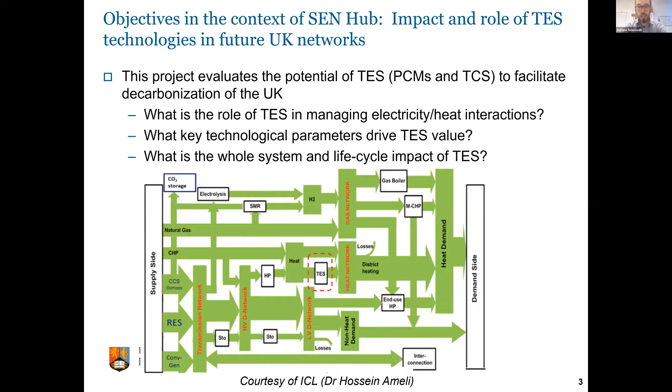As you see in this schematic that Hossein kindly passed along, the focus will be on this part - the role of thermal storage, with a focus on how these possible portfolio technologies interact with the whole UK energy system.

As you might appreciate, this obviously requires research operating on different axes. From the University of Birmingham, we focus mostly on the technological and techno-economic characterization and reduced models of specific thermal energy storage technologies, which I will discuss in more detail later on.

This technical and techno-economic information is shared and exchanged bilaterally with the investigation at the University of Manchester regarding life cycle analysis of these technologies, as well as the integration of these models into the whole system modeling platform developed at Imperial College, with the aim to understand the impact and value of thermal energy storage technologies when deployed across the United Kingdom and different regions.

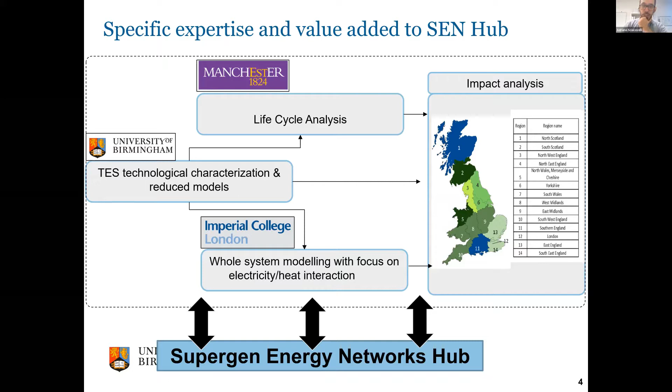One of the key ambitions and objectives of this project is not only to carry out this piece of meaningful research, but also to bring to the Supergen Energy Networks Hub a set of specific expertise on such technology and approach, to contribute to the ambition and objectives of the Energy Network Hub.

So I would like to spend the next few slides commenting on and presenting the precise contribution and work going on from our side at the University of Birmingham, and how this feeds into the work at Manchester and Imperial College.

We are focusing this project on two specific classes of technologies: latent heat thermal energy storage technologies, as well as thermochemical energy storage technology. So we are focusing on near-to-market solutions, namely latent heat storage systems, as well as storage solutions that are in R&D stage, which are the thermochemical energy storage.

And we use instead sensible, conventional, well-established storage technologies as a baseline for cross-comparison of the impact of latent heat and thermochemical storage options.

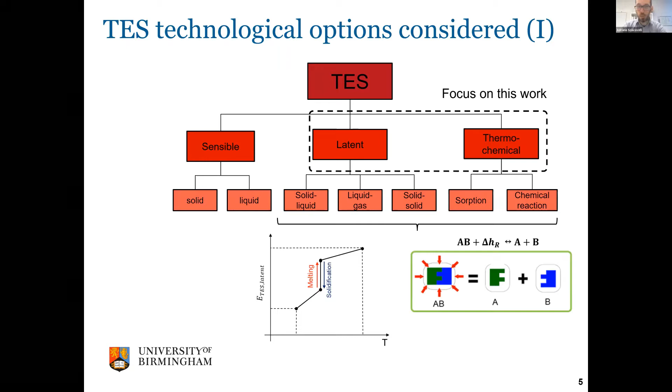For those who might not be familiar, latent heat storage options operate by the working principle of melting and solidifying suitable materials, called phase change materials. So heat or cold is stored in the form of latent heat, while thermochemical storage systems exploit reversible chemical reactions - heat is stored in the form of chemical bondings, allowing higher energy storage densities and longer duration storage.

The work at Birmingham has been focusing on extracting the key techno-economic parameters of these two technologies, as well as producing reduced models that can support the life cycle analysis and whole system analysis carried out at the other two institutions. So on this slide, as exemplar cases, you can see at a laboratory scale...

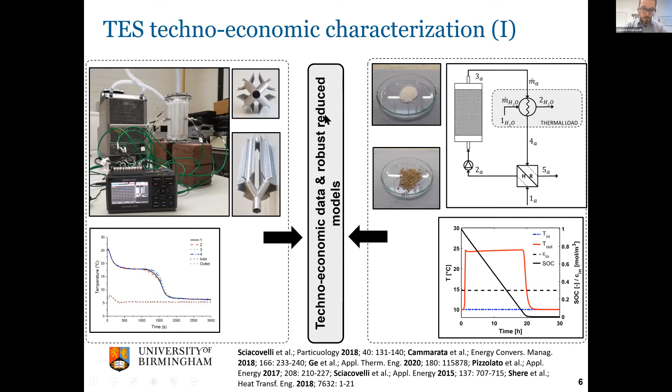These are salt hydrates that allow heat storage by reversible reaction of hydration and dehydration. The key here in this project is not technological development, but extracting the right and accurate techno-economic parameters and models so that life cycle analysis and whole system analysis is grounded and based on meaningful technological data.

So we have developed a procedure to extract these techno-economic parameters, starting from the development of a comprehensive database that covers multiple implementations of these two technologies, latent heat or thermochemical storage technologies.

We are focused mostly, for latent heat, on systems suitable at domestic scales - systems using PCMs that are paraffins or fatty acids with storage temperature typically from sub-ambient for cold storage to about 100-120 degrees C. For thermochemical storage systems, we have been focusing on salt hydrates, which are the most suitable for domestic applications.

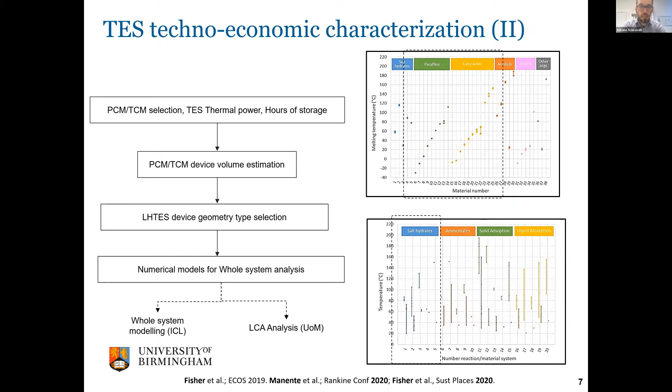The techno-economic database starts from selection of a candidate, assesses the typical requirements for thermal power and hours of storage, then identifies the necessary volume of the storage system and possible geometrical configurations, ultimately producing reduced numerical models that can be integrated into the whole system analysis, while techno-economic parameters can be easily included in the life cycle analysis.

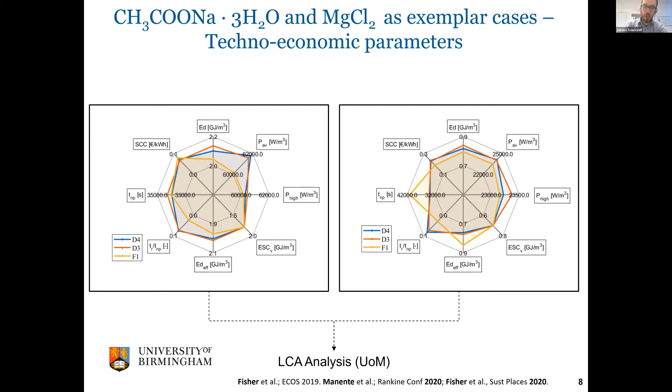So I'll take a couple of exemplar cases of how these techno-economic results appear in our study. Here you see two exemplar cases of the range of techno-economic parameters we are extracting to support the analysis. Sodium acetate trihydrate is a typical phase change material with a good range of energy storage density, power density, and cost, while magnesium chloride is a typical thermochemical storage material used in thermochemical storage systems, allowing sufficient energy storage density and relatively compact solutions suitable for compact storage systems. These are the typical techno-economic parameters we are putting together to support the life cycle analysis.

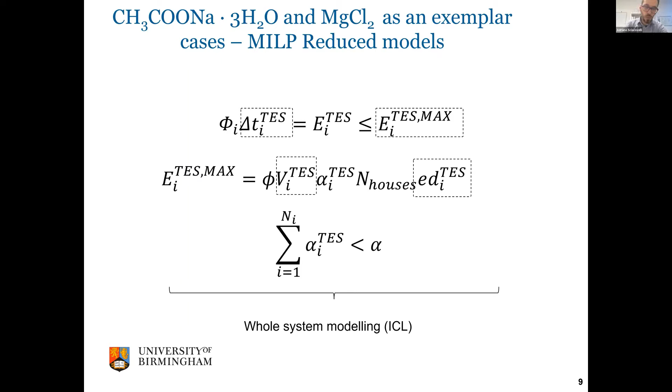For the reduced modeling approach, we have developed together with colleagues at Imperial College a mixed integer linear programming framework of reduced model of thermal storage that allows us to embed key performance indicators, namely energy storage density, maximum energy stored, and volume of storage system, into the whole system modeling. A key feature of this reduced model is that it allows us to account for different types of storage systems distributed at different locations across the UK. This is captured by a parameter that allows the best storage system to be distributed in the best location across the UK.

So this brings me to my last slide. Just to reiterate, the project addressed the whole system role and value of thermal storage technologies, particularly PCM-based and thermochemical storage-based. At the University of Birmingham, we are focusing on the techno-economic parameters and reduced models to support the life cycle analysis and the whole system analysis.

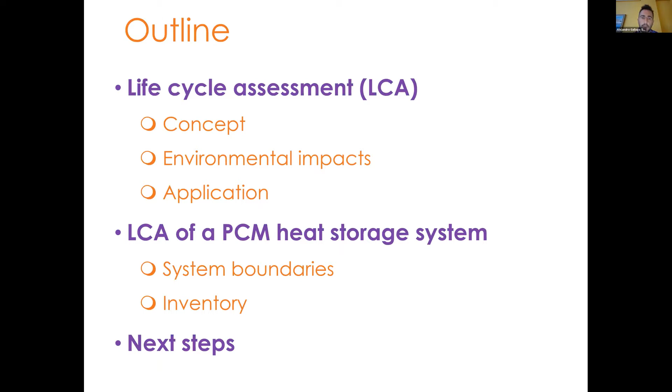I'm going to be talking about the main environmental impacts that we can calculate with LCA and some of the most common applications of this tool. After that, I'm going to focus on the work we have been developing in this project, which is the LCA of a PCM heat storage system. This is work in progress, so I'm going to present just a snapshot of what we are doing at the moment. So far, we have defined the system boundaries and collected all the inventory data. Finally, I'm going to present the next steps we are going to be doing in the following months.

Life cycle assessment is an environmental sustainability tool that allows us to calculate or quantify the environmental impacts of different products, processes, or services, and it's based on the concept of life cycle thinking. And maybe the next question you have is, what is life cycle thinking? For example, as a consumer, I have bought the laptop in front of me, but if I start to think what impacts this laptop has, maybe I only realize what I see, which is the impacts of taking my car to the shop to buy the laptop. If I think a little farther, the electricity when I'm using the laptop can have some environmental impacts. And if I go even farther, what are the impacts associated to the end of life of this laptop? What happens regarding the different materials, if it goes to recycling, landfill, or incineration?

But obviously, there is much more, and that's the concept of life cycle thinking. We have all the impacts associated to the life cycle of the product.

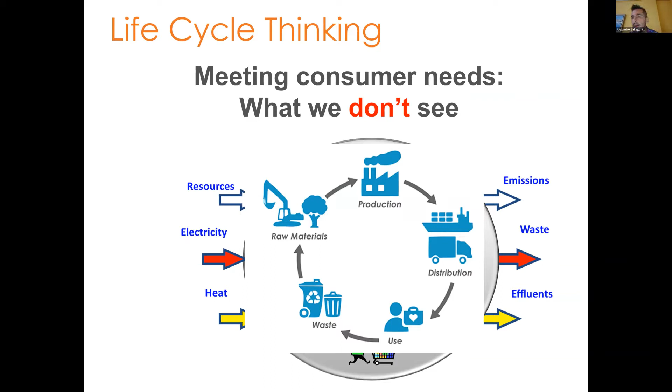That's the concept of life cycle thinking, summarized well in this final image. When doing a life cycle assessment with the environmental part, we consider all the impacts associated to the extraction of raw materials, to production, to distribution, to use, and to end of life of a product. But as I mentioned, it can also be applied to a process or a service.

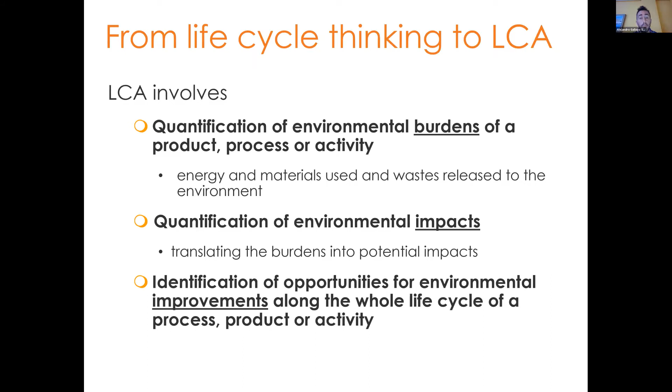Basically, what LCA does is quantify all the environmental burdens of this product, process, or activity. We collect all the energy and materials used and waste released to the environment, and we quantify the environmental impacts by translating the burdens into potential impacts, as we'll see in the next slide. That allows us to identify opportunities for environmental improvements along the whole life cycle of a product, process, or activity.

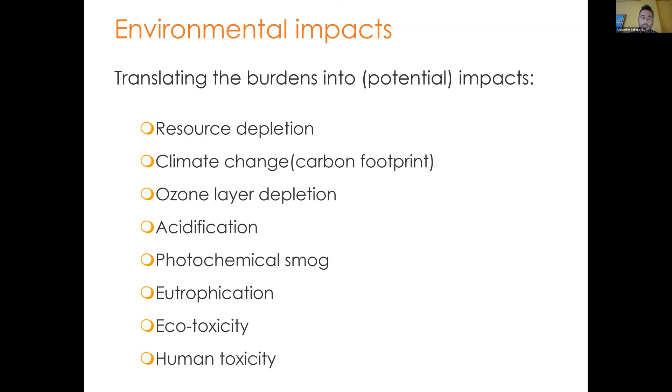So one question can be, what environmental impacts do we consider? With the methodology we use, we are able to calculate up to 18 different environmental impacts. You have some examples: acidification, eutrophication, resource depletion. Maybe you have heard already the term carbon footprint. Carbon footprint is nothing else than an LCA applied only to one impact category, which in this case is climate change.

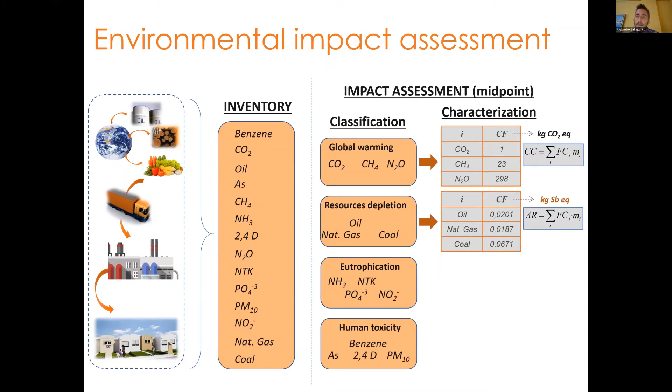In the case of global warming, the unit we use is kilograms of CO2 equivalent. Thanks to the characterization factors of the Intergovernmental Panel on Climate Change, we can translate all those emissions into this common unit. For example, we know that 1 kilogram of methane produces the same impact, from the point of view of climate change, as 23 kilograms of CO2. So with that characterization factor, we are able to express the emission in kilograms of CO2 equivalent.

Similarly, this is done with the other impact categories, obviously with different units. That allows us to calculate the different impacts.

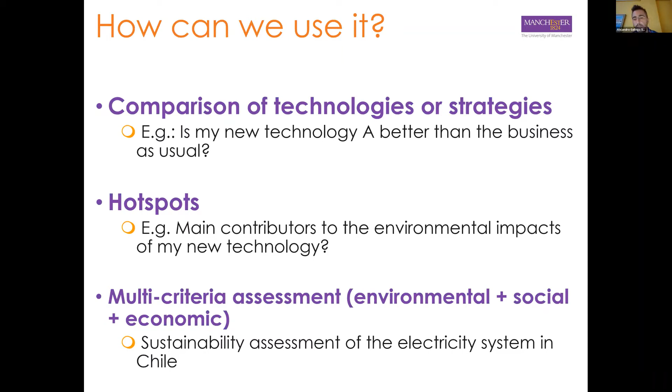The other option is that I've been focusing in this presentation on the environmental perspective, but life cycle thinking can also be applied at the social and economic perspective. In the case of social perspective, we talk about social LCA, and in the case of economic, we talk about life cycle costing. So another option is to do a multi-criteria assessment considering environmental, social, and economic aspects. That's something, for example, that we have done in the past to assess the sustainability of the electricity system in Chile.

Now I'm going to focus on the second part of the presentation, on the specific work that we have been doing in this research project. What we are doing at the moment is the LCA of a PCM heat storage system.

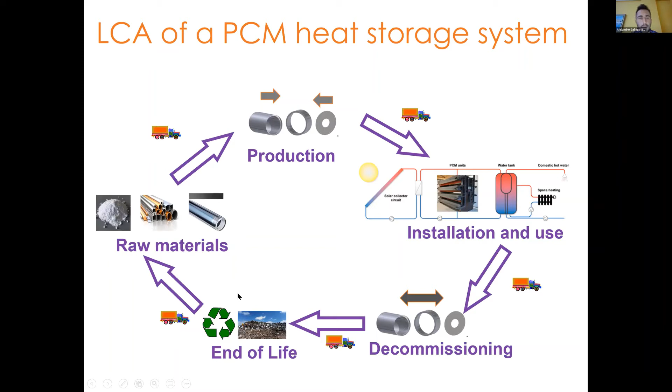Basically we have considered a system that is cradle to grave, so we consider all the stages of the life cycle of this system. We have considered the extraction of the raw material, the impacts associated to the production, as well as the impacts that happen during installation and use, and even further than that, what impacts are associated to the decommission and what happens with those materials at the end of life. In some cases we can have what is called closed loops through recycling, and some of these materials can go again into the system, which is the reason we have this arrow here.

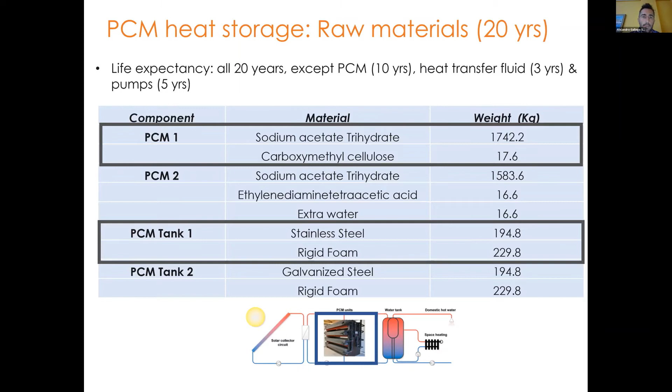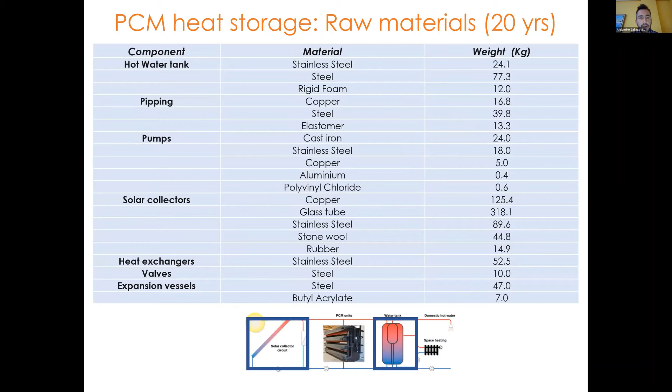Basically we have here the amount of raw materials that we need for each component for this 20-year period. We have considered initially two compositions, both for the chemical part, for the PCM, and also for the infrastructure of the PCM unit. I'm going to focus in this presentation on the first composition, which is PCM1 and PCM tank 1. For the rest of the parts of the system, you also have here the inventory of the different materials.

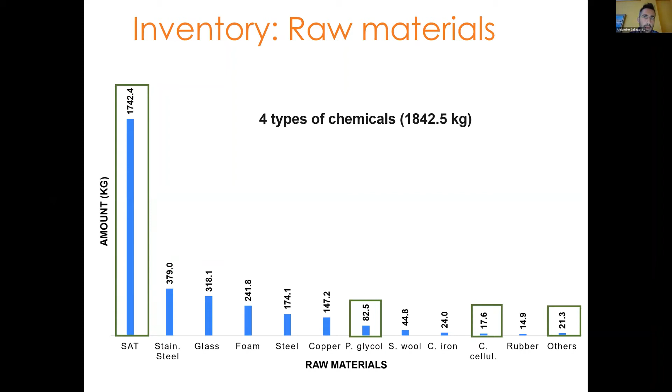In this case, for the solar collector, but also for the pumps, piping, hot water tank, heat exchangers, valves, and expansion vessels. So if we put all of this together, we can see that there are 4 types of chemicals.

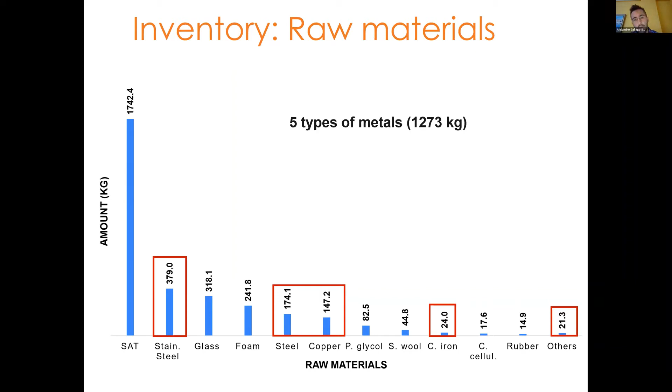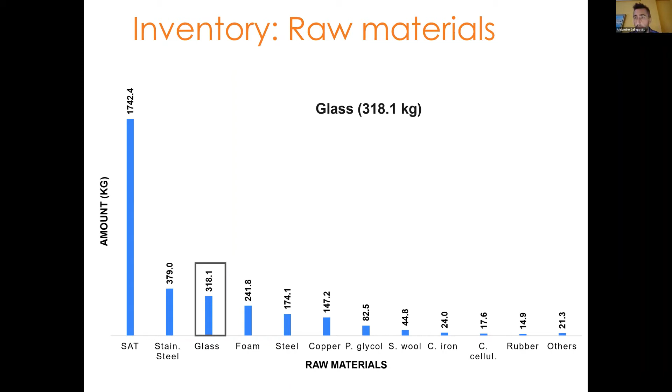The most important regarding weight is the chemicals, mainly through one of the components of the PCM, the SAT. We also have 5 types of metals, mainly associated to the infrastructure of the PCM units, and also associated to the water tank.

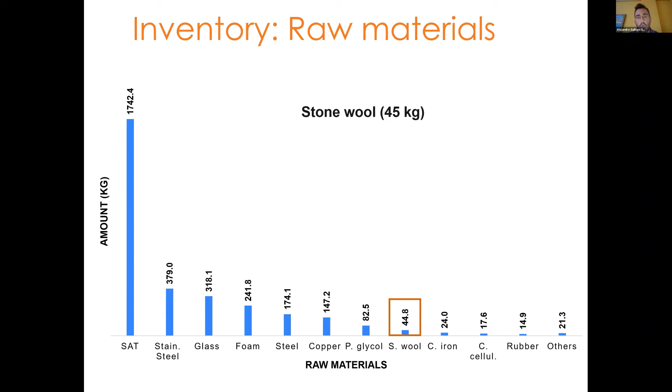We have glass, which is quite important in weight and is associated to the solar collectors. We have different types of plastics, and finally we have stone wool, which is used as an insulation system in the solar collectors.

Obviously, we have other stages of the life cycle assessment that we have to consider, the production of all the parts of this system, where mainly we have seen it is energy that we are consuming, heat and electricity. As well, we have to consider transport by truck, ship and train, because obviously there are emissions associated to this transport. We have to consider installation and decommissioning, which in this case we have decided to consider negligible impacts, because most of the work is going to be manual or with small tools.

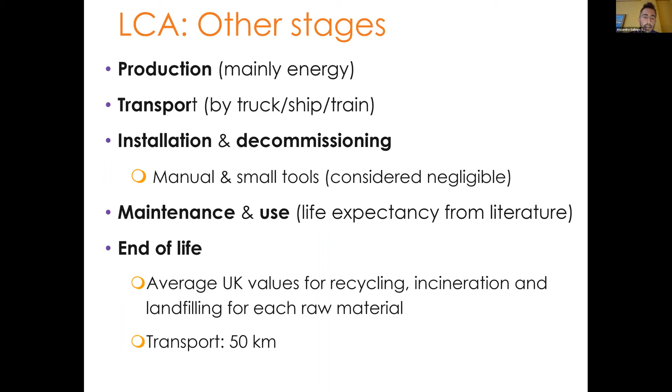Regarding maintenance and use, the life expectancy we are considering is very important, and we got all the data based on what is available in the literature. Regarding the end of life, we have considered that this system is in the UK, so we have taken into account the average UK values for recycling, incineration, and landfilling for each raw material. Something that is common in LCA, we have considered a distance from where the waste is produced to the waste management facility, an average of 50 kilometers.

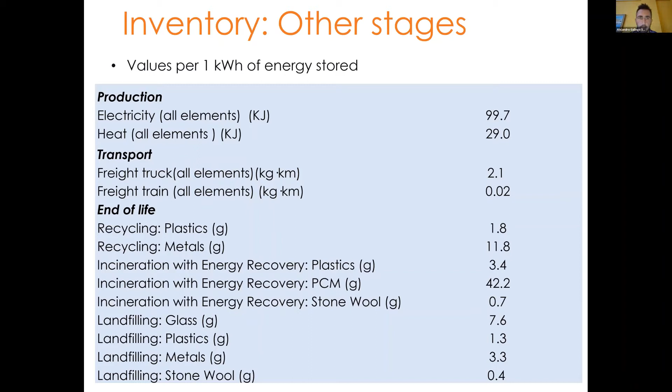So finally, for the other parts of the system that are not raw materials, here you have the final inventory. In this case, we have considered a functional unit, or the unit that we take as a base to calculate this, which is 1 kilowatt hour of energy, in this case, heat storage.

And you have here, per kilowatt hour of this heat storage, how much do we spend in energy in the production, transport, and what happened at the end of life with the different materials.

Sadly, we were not able to bring to this webinar the final results of the impacts. We are still working with them, we are almost there. So the next obvious step is to finish the calculation of these impacts and start to see the interpretation of the results.

We will start to see that the chemicals and the infrastructure can be the potential hotspots, and from there we will look for potential improvements. One of the options, as I mentioned at the beginning, is to consider other configurations that are available for those chemicals and for the infrastructure, as we have over here.

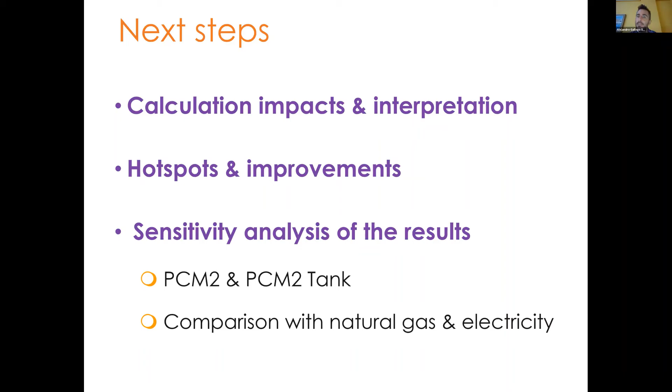Another option is to compare with natural gas and electricity, how the same amount of heat is produced by natural gas and electricity. Further along the line, we also want to calculate the environmental impacts of introducing this kind of system into the whole energy system of the UK, which is what my colleague Hossein is going to present in the next presentation. Many thanks for your attention, and I will remain attentive to any questions that you have.

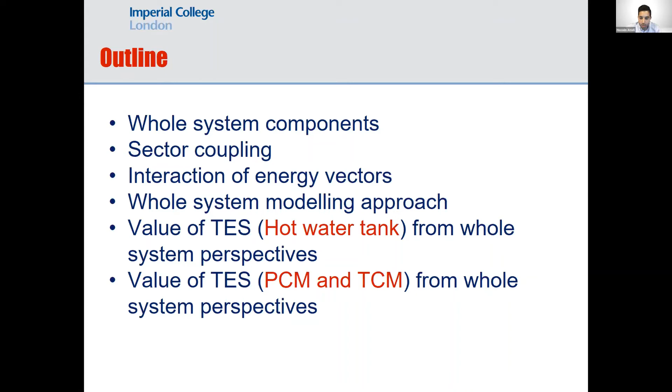Let me have a quick look at the outline of the work. First, I want to introduce what the whole system components are, then talk a bit about the sector couplings, then the interaction of the energy vectors and how we do the whole system modeling approach, and then we consider two cases to quantify the value of the thermal energy storage systems, hot water tanks, PCM and TCM, from the whole system perspective.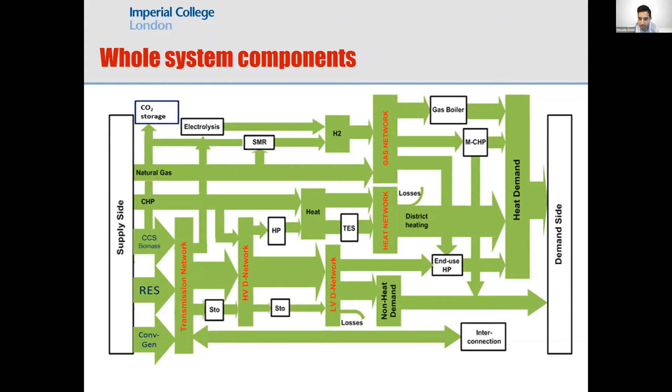Of course, we saw this figure before in Adriano's presentation. This shows what the whole components are that we could have in our modeling from the whole system perspective, and as we can see there are some parts related to the electricity side, the heat network, and the gas network. The focus here is mainly on the TES block, to see what the value of this technology is from the whole system perspective, to see how this flexible option can provide flexibility to the other vectors, and what the benefit is of having different types of TES in the whole system model.

Here we are focusing more on the heat and electricity network. As you can see in the figure, we have the spatial granularity from transmission to low voltage distribution on the electricity side, as well as the heat network, and we can see where the interactions are and what the coupling components are, which can increase the interaction between these two vectors.

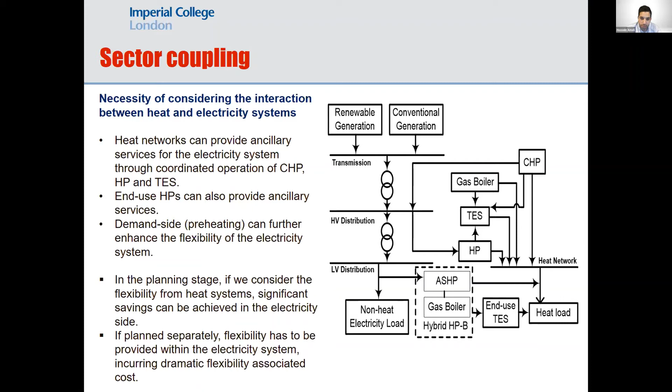As mentioned, on the demand side, if we have preheating, this can further enhance the flexibility in the electricity system. In our analysis, we demonstrated that if we have integrated planning for heat and electricity, the flexibility in the heat system can provide significant savings in the electricity system, since we reduce reinforcement costs on the electricity side. But if they are planned separately, this will incur dramatic costs associated with flexibility compensation.

What is the necessity of whole system modeling? First, with this option we could see the interaction between different levels of assets. Investment in one infrastructure can potentially influence the other energy vector, and we will see both operational and investment timescales, from seconds to years, and this can also be considered.

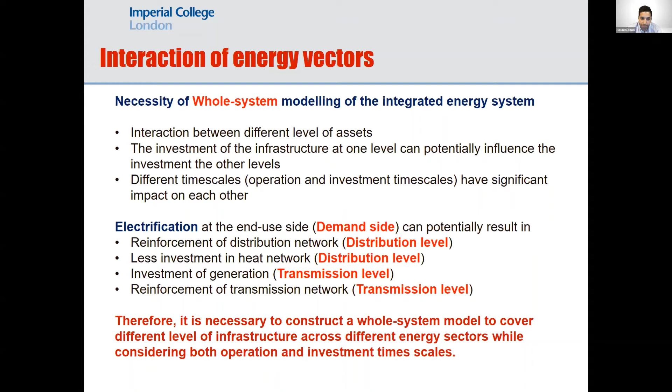One aspect that makes this whole system modeling very important is the electrification of the end-use side, because this will result in reinforcement in the distribution network, reinforcement in the transmission network, investment in generation, and also less investment in the heat network, because we will provide the heat by electricity. So this will have all these interactions, and therefore it's necessary to have this whole system model to cover different levels of infrastructure across different energy vectors. The aim is to minimize both operational and planning costs of the whole system, including electricity, heat, and also gas, hydrogen, etc.

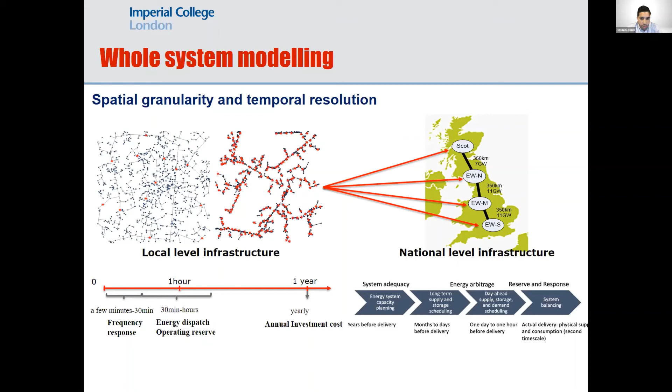In whole system modeling, we have spatial granularity and temporal resolution presented. For example, we have it from local level infrastructure to national level. In our case, the national level is divided into 4 regions, modeled by 4 nodes. The timescales are also presented, from a few minutes for frequency response regulation requirements, to hours for unit commitment and dispatch of energy, to yearly time horizons for the planning side of the modeling.

So let's go through some results, mainly provided by my colleague Xi, who did the simulations.

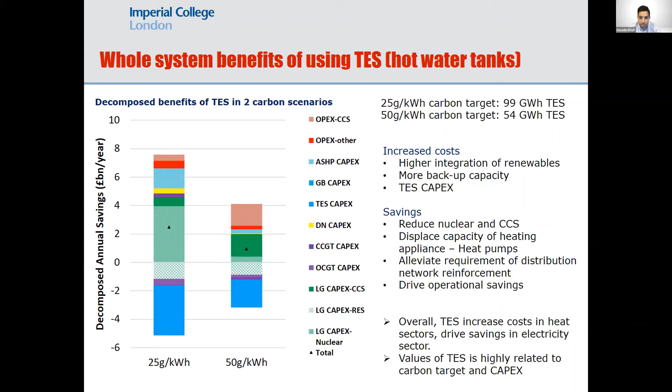If you see in the figure, the black triangle shows the overall savings we could achieve in both cases. As we can see, if we want to go to lower carbon emission targets, we could save more through this flexibility in the heat system, which will provide overall more savings in the whole system consuming electricity and heat.

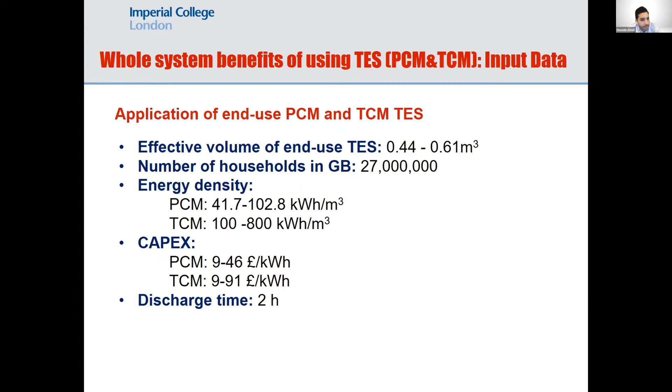Then the focus comes to TCM and PCM, which is the main work we have done with our colleagues at Birmingham and also Manchester, who provided us inputs in terms of the energy density, capex, and volume of the thermal energy storage systems. We then ran some sensitivity analysis to see how different parameters can impact the value of the thermal energy storage systems from the whole system perspective.

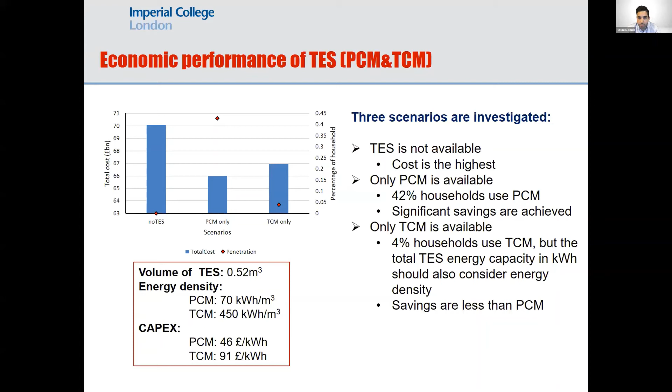So in this case we are showing the economic performance of TES. The red box is the assumptions we used in our modeling, and it's shown that if we have PCM only scenario, this is the most cost-effective case, giving the most savings. We need to install 42% penetration level in the households for PCM, but for TCM it's only 4%. That's due to the higher energy density that TCM provides, but the savings are less compared to the PCM case.

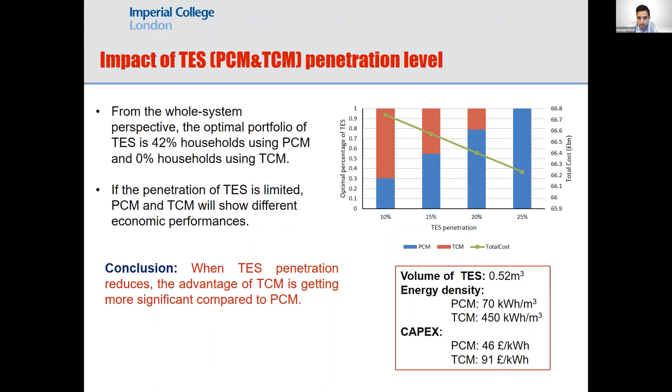Now we focus more on the sensitivity analysis. Here we see how the proportion of each of these technologies should be in terms of the TES penetration level into the households. It's shown that for smaller penetration levels, for example 10%, we should go more for TCM. But if this penetration level increases, the role of PCM will increase, and even after 25% we can see we go 100% with PCM and don't need any TCM. The green line shows the total cost of the system. So in conclusion, when the TES penetration reduces, the advantage of TCM becomes more significant compared to PCM, but if we increase the penetration level, it's the other way around.

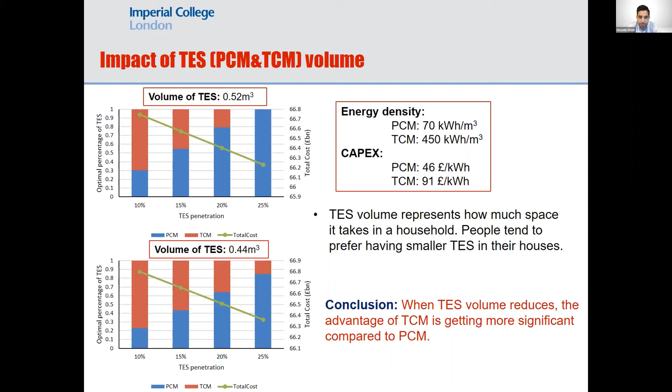Now we consider two parameters, the penetration level and the volume. We have two cases for the volume: in the top figure we assumed 0.5 cubic meters, and in the bottom case it's almost 0.4 cubic meters. It's shown that when the TES volume reduces, the advantage of TCM becomes more significant compared to PCM, mainly due to the higher energy density that TCM has compared to PCM based on our assumptions.

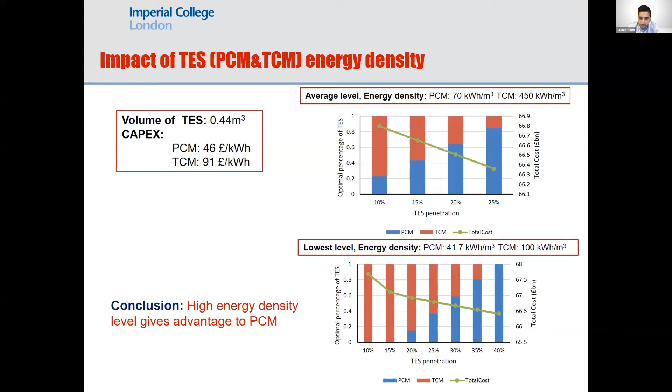Here we are considering the penetration level and the energy density, and it is shown that for higher energy density, it gets more favorable for the PCM. For example, if you compare the 25% penetration in both figures, the proportion of PCM in the top figure is almost 80%, but in the bottom figure it's nearly 35%. This shows that TCM can play a more important role when energy densities are lower, but for higher energy densities, PCM has more advantage.

That's it for what we have done so far in terms of the optimization and simulation that has been carried out. And just some remarks on future work.

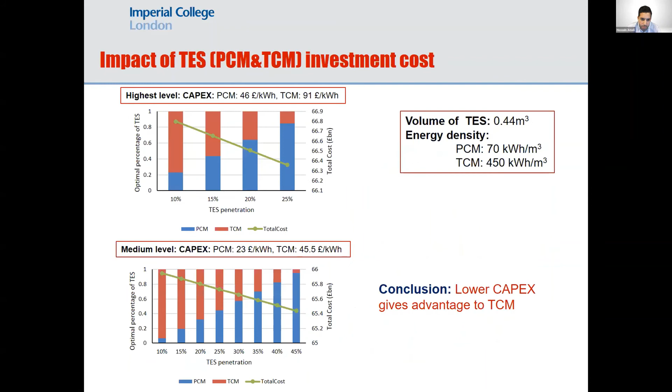In this work we considered the end-use TES technologies, PCM and TCM. With our modeling, we were able to optimize the proportion of each of these technologies across GB, which was 27 million households. The proportion has been presented based on different assumptions and parameters, which were the CapEx, the energy density, and the volume.

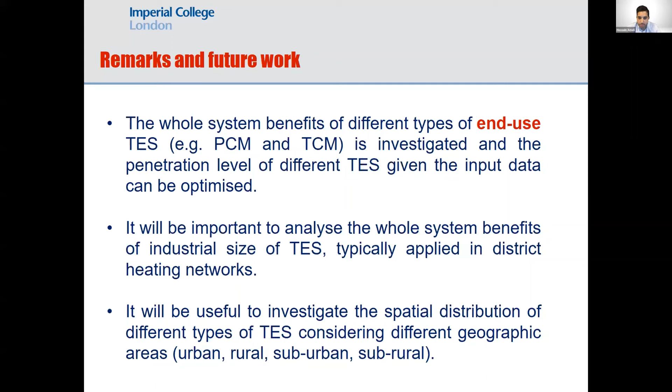For future work, we are still working on the end-use TES, working more with our colleagues at Birmingham and Manchester to get more precise parameters for the modeling. It's also important to analyze the whole system benefits of industrial-size TES, which would typically be applied in district heating networks, and also to consider more the spatial distribution of different types of TES depending on geographic areas like urban, rural, suburban, and sub-rural, because different geographic areas could have different uses of heat, so the mix and optimal proportion of these technologies might be different. We are keen to consider these in our modeling.

So that's it from my side. Thank you very much, and sorry if I mentioned any TCM and PCM wrong, because they are very close letters, so there might be some mistakes, but I hope it was all fine.